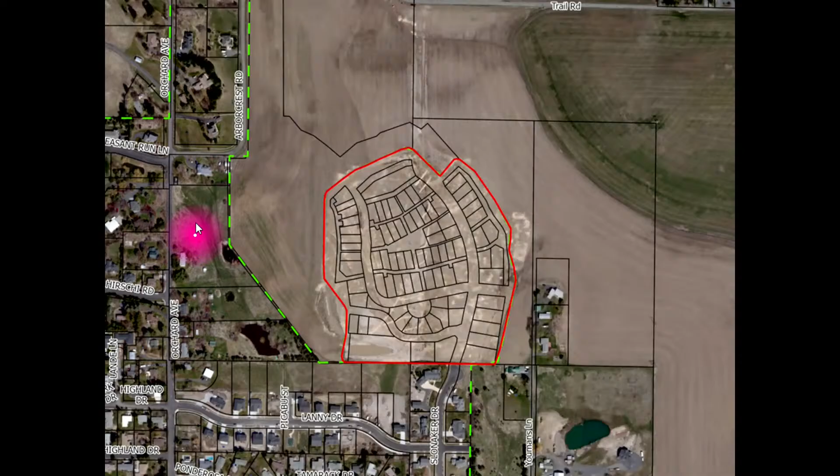This is the subject property highlighted in red, the center of your screen - it's the Woodbury 1st Addition. Currently an outdated photo, but infrastructure has been constructed on a portion, phase 1. Woodbury Drive, you can see the plat lines here, and Slonaker has been extended to about this location. Lanny Drive with Peekaboo Estates Edition is to the southwest. Orchard Avenue runs north-south, located to the west. Arborcrest and Trail Road are here to the north.

The applicant is Winston Company LLC. They're proposing the major PUD amendment of the existing 21.73 acre Woodbury 1st Addition subdivision to increase the number of lots from 78 to 107, ranging from 715 square feet to 22,215 square feet in size.

Also included in the proposal is the proposed preliminary replat of just a 12.27 acre portion of the existing subdivision, to create 81 lots from the existing 52. Those lots range from 715 square feet to 8,339 square feet in size. The proposal is referred to as the Woodbury 1st Addition replat, and it would increase the total number of lots in the subdivision from 78 to 107.

So a little bit of background: September 20th of 2021, City Council approved the annexation, comp plan designation, zoning designation, and PUD for Woodbury 1st Addition with no conditions. Subsequently, Council approved the preliminary plat for Woodbury 1st Addition with the following 3 conditions recommended by the Planning and Zoning Commission.

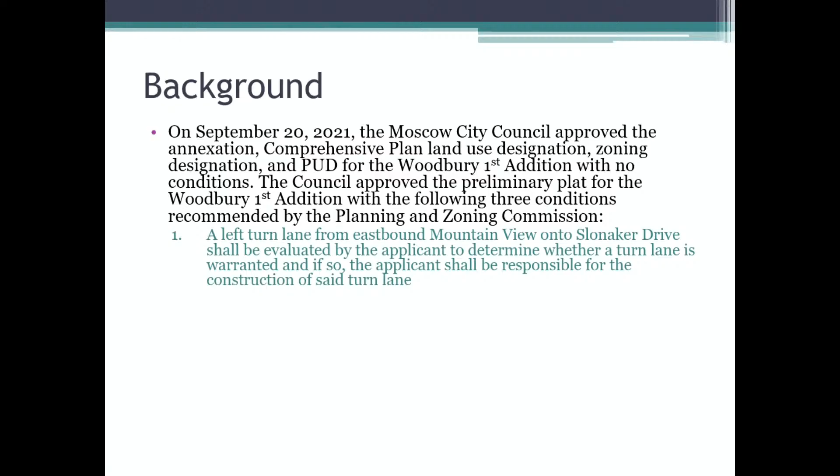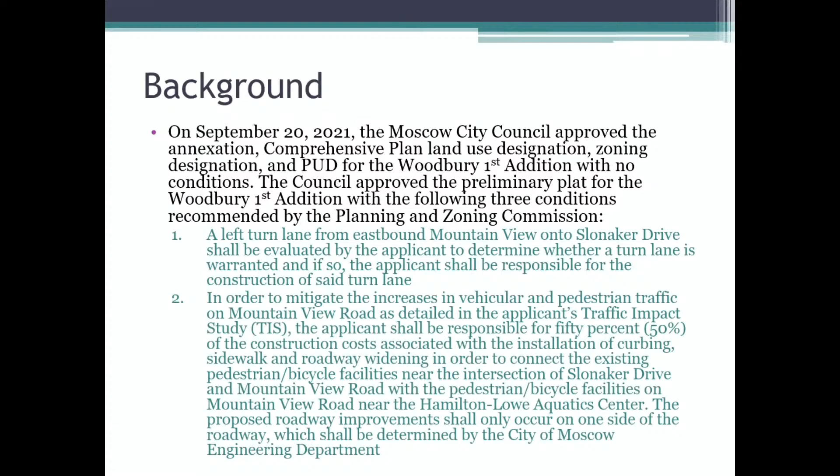The first was related to a turn lane eastbound on Mountain View onto Slonaker Drive. The second was improvements to Mountain View Road, essentially from the Herc all the way up to the Slonaker intersection, on the east side of the roadway. Then access shall be restricted to the subject property from Slonaker Drive. That was mainly just for the public infrastructure improvements to the streets at that time.

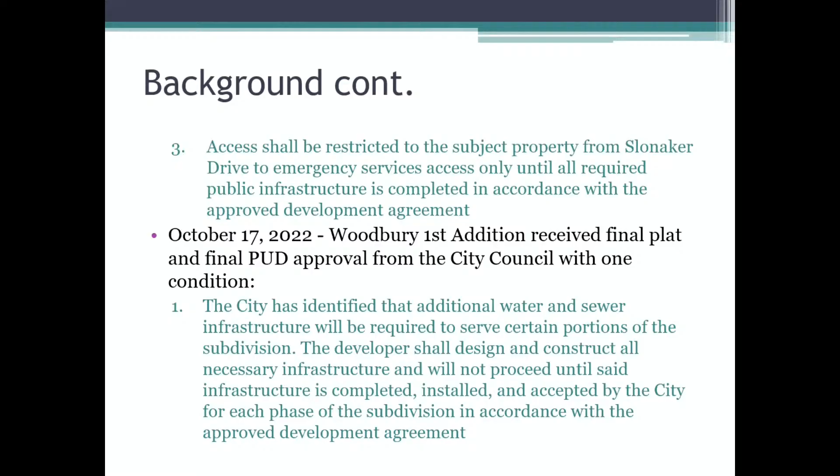October 17th of 2022, Woodbury 1st Addition received final plat and final PUD approval from the City Council with 1 condition. The city identified at the time that additional water and sewer infrastructure will be required to serve certain portions of the subdivision. Developers shall design and construct all necessary infrastructure and will not proceed until said infrastructure is completed, installed, and accepted by the city for each phase of the subdivision in accordance with the approved development agreement.

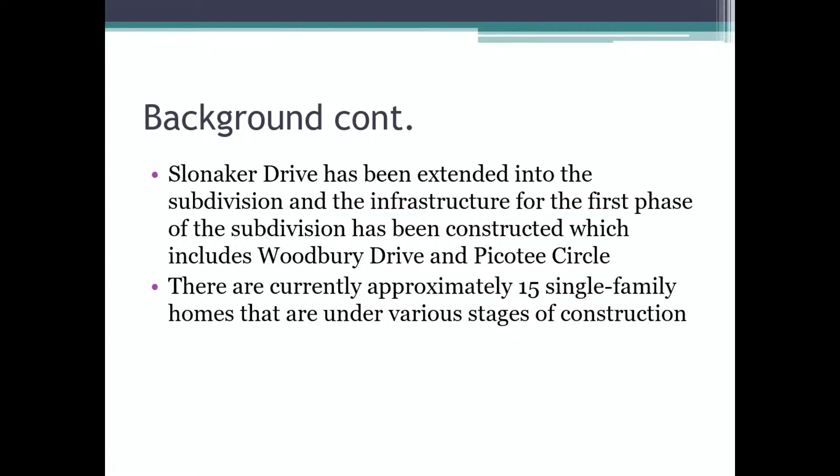As mentioned before, Slonaker Drive has been extended into the subdivision. Infrastructure for the first phase has been completed, including Woodbury Drive and Picotee Circle, with currently approximately 15 single-family homes under various stages of construction within the subdivision. Improvements to Mountain View Road—road widening, curb gutter, tree lawn, sidewalks, as well as the left-hand turn lane onto Slonaker Drive—were constructed in 2024.

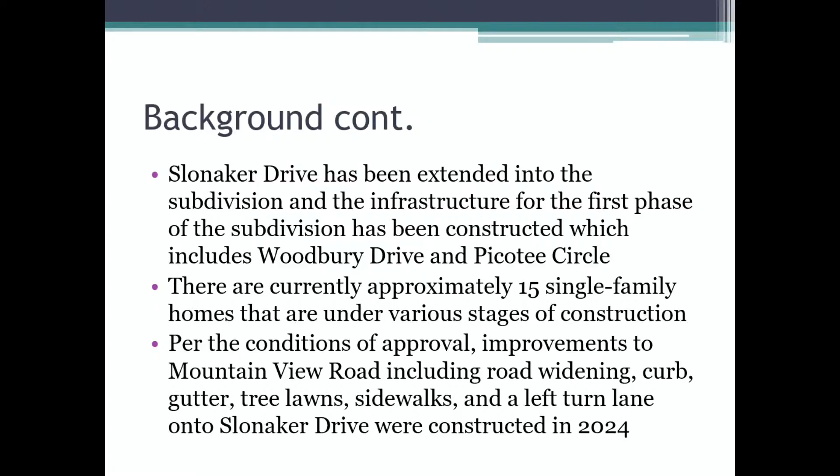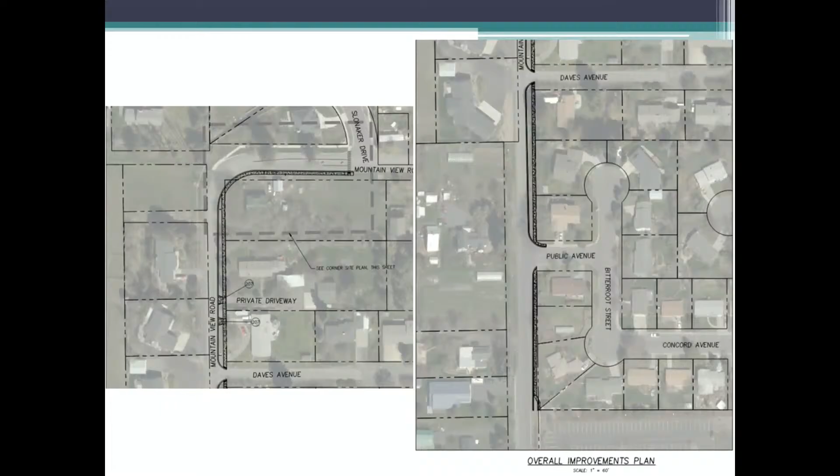You can see xeriscaping throughout the subdivision, with small lot sizes. These are the improvements that were constructed on Mountain View Road—you can see from the Herc all the way up to that intersection, and then there's the left turn lane onto Slonaker.

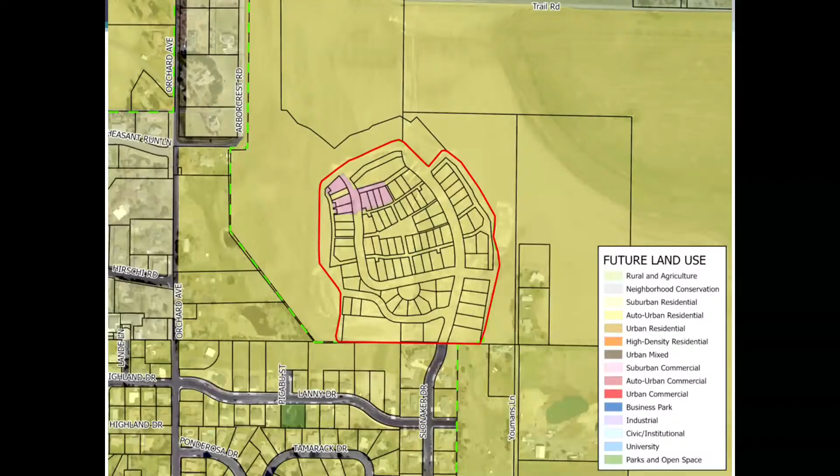The Comprehensive plan land use designation is suburban commercial for this pocket located near the Central Park area of the core development. Auto urban residential is the yellow designation, and the surrounding property is also designated as auto urban residential.

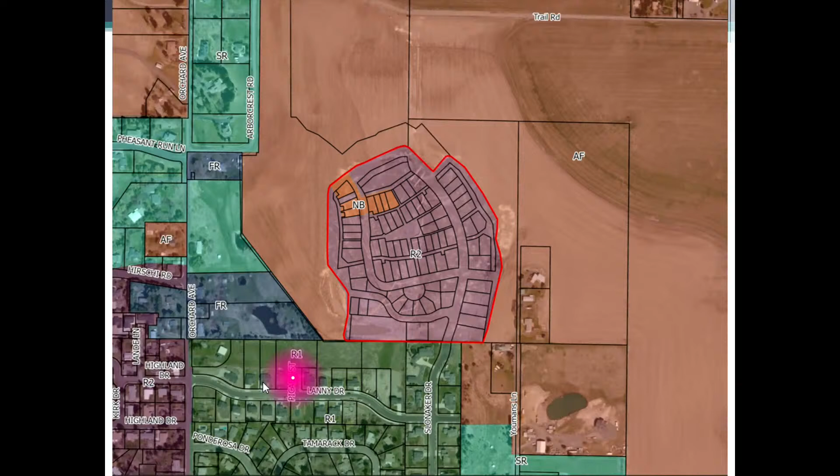The zoning configuration shows neighborhood business properties located near the core, and then an R2 designation, which is moderate density single family residential, for the remainder of the first phase of the subdivision. Surrounding the subdivision within the county is the ag forest zone, R1 down here with Peekaboo Estates, as well as the Blackwood addition on Slonaker Drive.

Continuing the background, the existing first addition subdivision and PUD is a 21.73 acre area with 78 lots ranging from 3,823 to 16,321 square feet in size. It's the first phase of a master plan subdivision, with a new urbanist design.

The entire property is 82 acres in size, extending from Slonaker Drive to the south, Arbor Crest Road to the west, Trail Road to the north, and slightly to the east of Youmans Lane to the east. This is the full master plan that the applicant plans on developing.

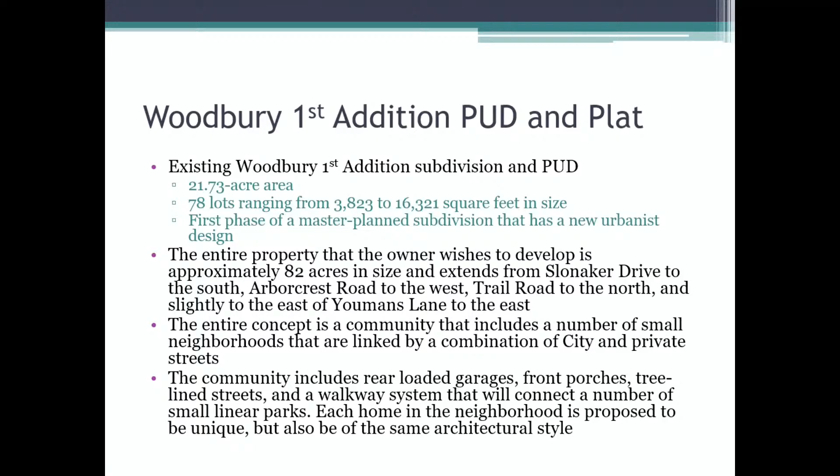The entire concept is a community that includes a number of small neighborhoods linked by a combination of city and private streets. It includes rear-loaded garages, front porches, tree-lined streets, and a walkway system that will connect a number of small linear parks. Each home in the neighborhood is proposed to be unique but also have the same architectural style. This gives an idea of how the rest of the 82 acres is planned to develop and how that first phase fits into the remaining 82 acres.

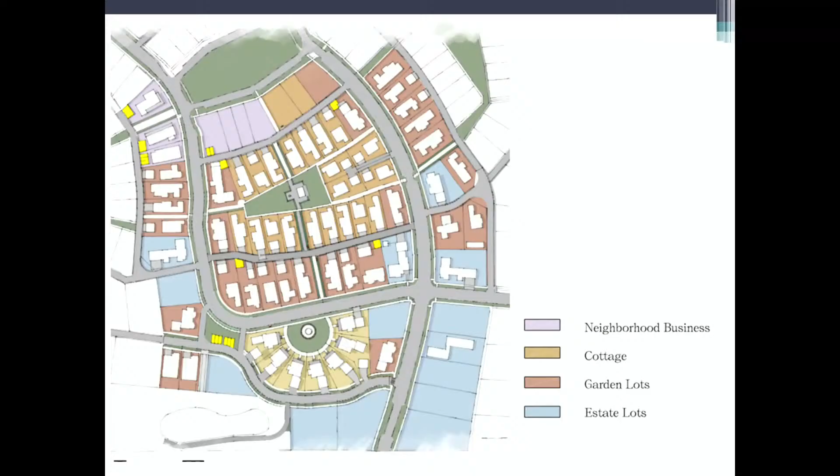So this was the original proposal. There's 4 different types of lots: neighborhood business, cottage, garden, and estate lots, really ranging in sizes. The estate lots were the larger lots on the outskirts of the development, trying to provide a transition from some of the existing subdivisions. They provided existing house plans as well as floor plans for each of the different types of lots.

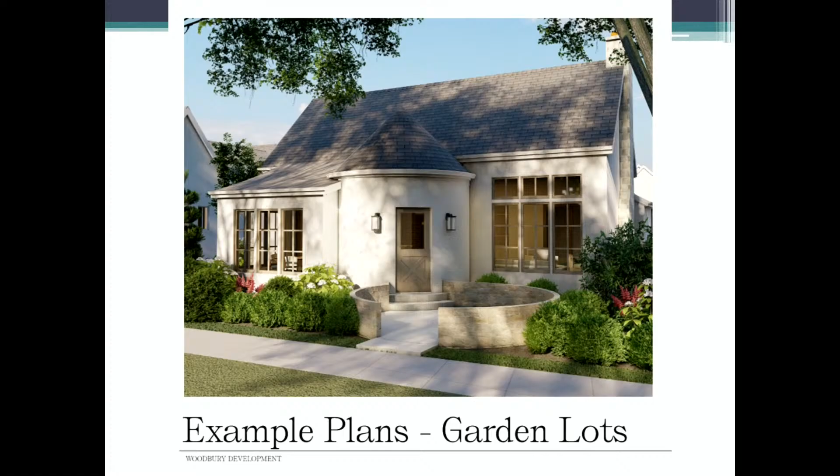So the applicants indicated they wish to make some changes to the existing subdivision and PUD in order to construct houses which are more affordable. Applicant indicates that one way of doing that without affecting quality is to decrease the size of the lots, decrease the size of the dwellings which are constructed upon the lots, and allow for a variety of housing types.

And therefore, they're proposing a major PUD amendment to increase the number of lots from 78 to 107. As part of the PUD amendment, applicant's also proposing the replat that we had discussed before. Currently contains 52 lots. The proposal will increase the number of lots within the replat area to 81 lots for a total of 107 in the entire subdivision.

So really, a few different areas the applicant's proposing changes on, about 5 different areas. And so we can start with Southwick Court and kind of move counterclockwise, but this is a Central Park area. Referring to the town center around the Central Park, and these are the neighborhood business zoned lots just for your reference here. So starting with Southwick Court, the proposal here is to take 4 existing lots and plat those into 9 more cottage lots with 2 different floor plans and sizes.

A walkway surrounds all of these lots here, provides access to the front, and then an internal parking area around the center of the development.

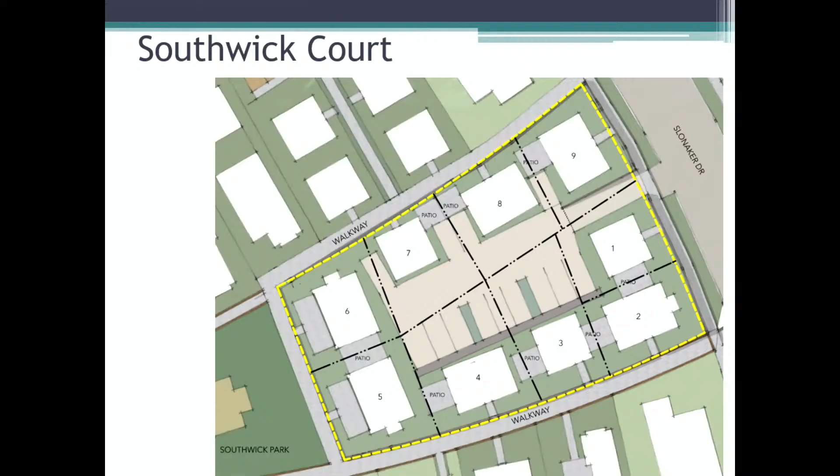So 3 dwellings are 1,100 square feet in size, contain 1 bedroom. 6 dwellings are 1,200 square feet in size and contain 3 bedrooms. All the dwellings in Southwick are proposed to be 2 stories in height, will surround a common parking area.

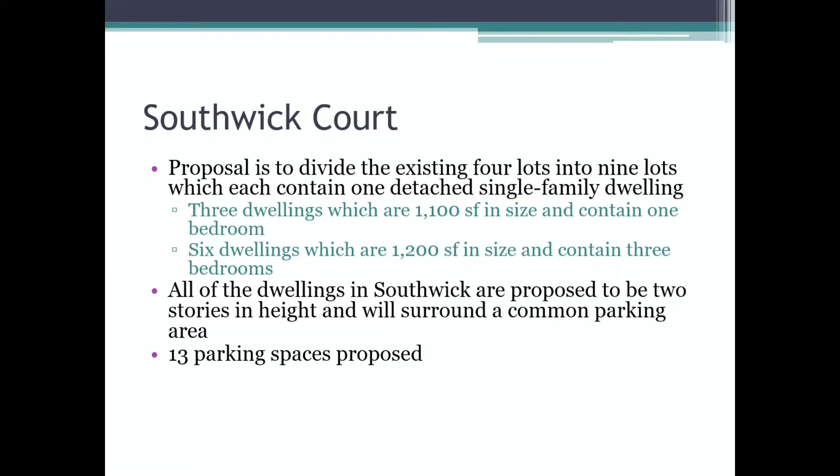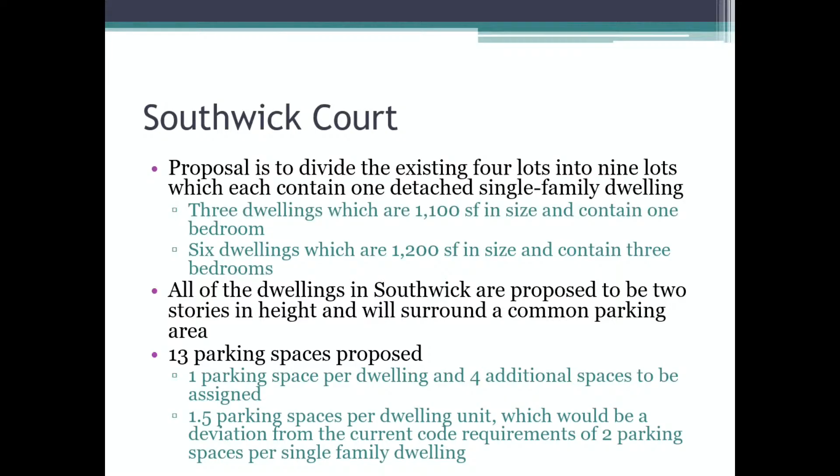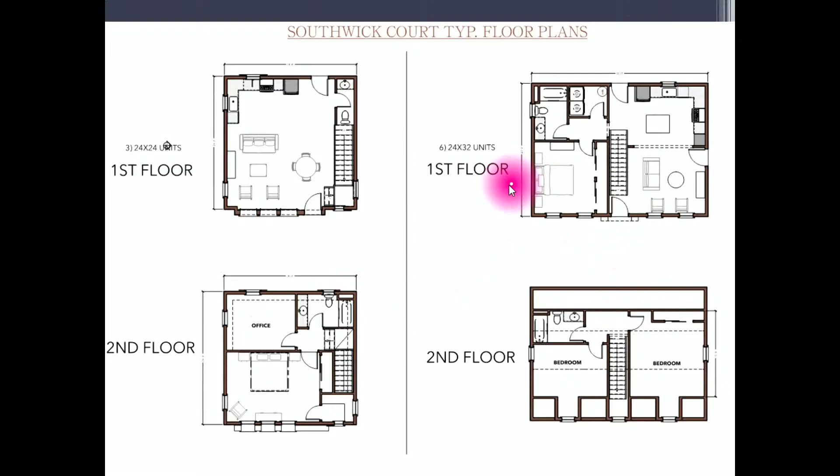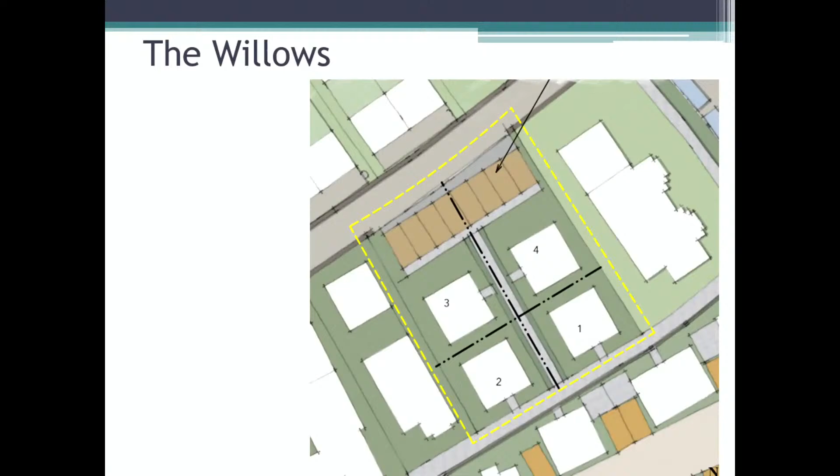So it brings us to the Willows, located here. So essentially dividing 2 lots into 4. And so these are smaller cottages with parking off of the private street.

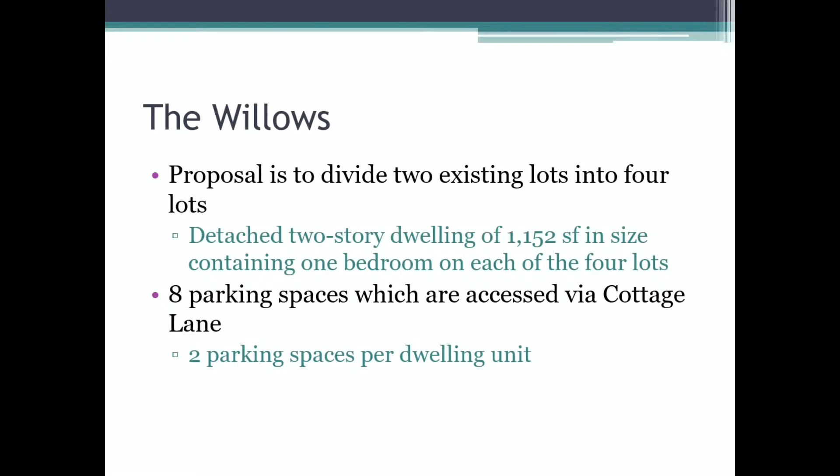So they're detached 2-story dwellings, 1,152 square feet in size, containing 1 bedroom on each of the 4 lots, 8 parking spaces, which are accessed via Cottage Lane. And that equates to 2 parking spaces per dwelling unit, which meets our current code requirements.

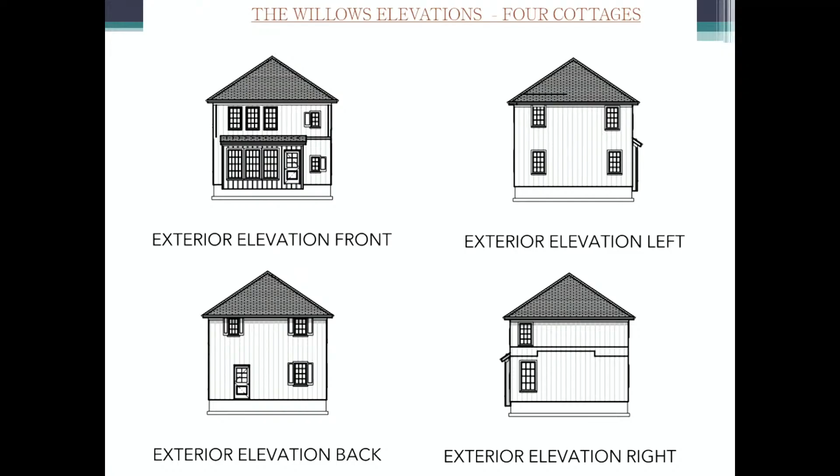Brings us to the Central Park townhomes portion. So some of these to the west of the pathway are within the neighborhood business zone. So the ones located over here, essentially planning on being townhouses for these units that face Park Place, which is the street that surrounds Central Park.

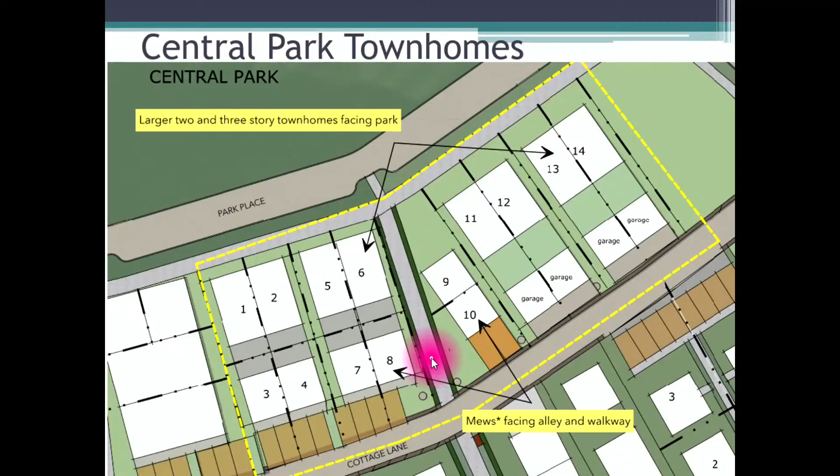And this is what the applicant's referring to as mews off the alley, which are just small dwellings. And then these townhouses to the east here have rear-loaded two-car garages.

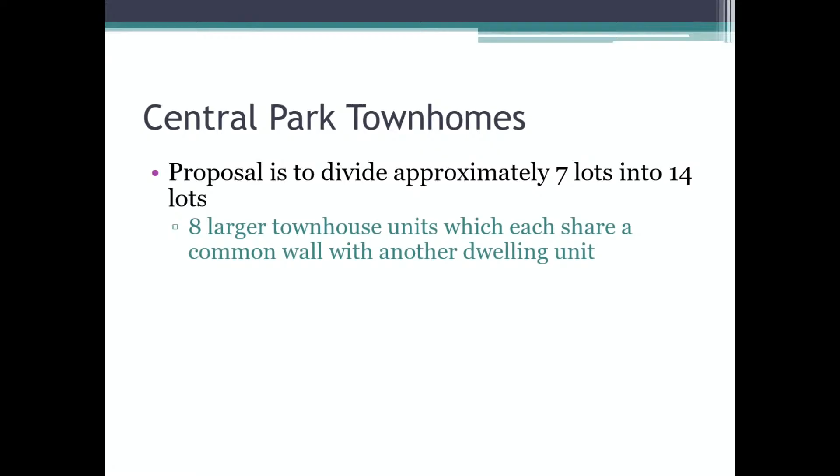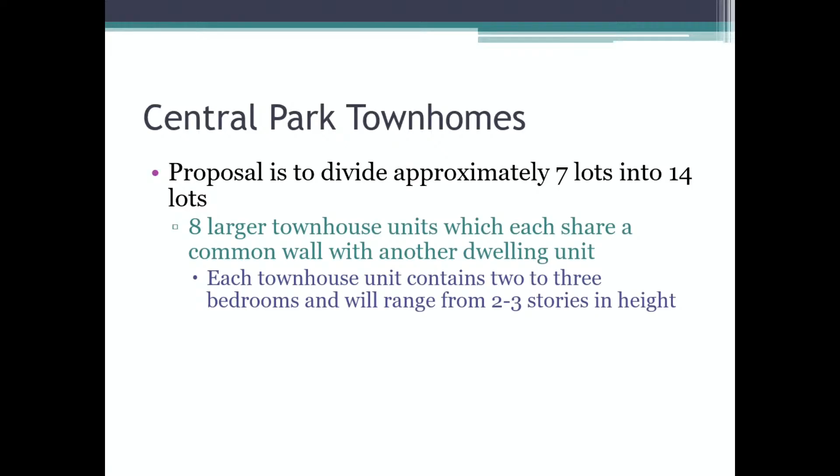So it's proposing to divide approximately 7 lots into 14, 8 larger townhouse units, which each share a common wall with another dwelling unit. So applicants calling these townhouses, but per our code, they'd essentially be twin homes since they're just 2 attached units. Each townhouse unit contains 2 or 3 bedrooms, will range from 2 to 3 stories in height, approximately 2,160 square feet in size.

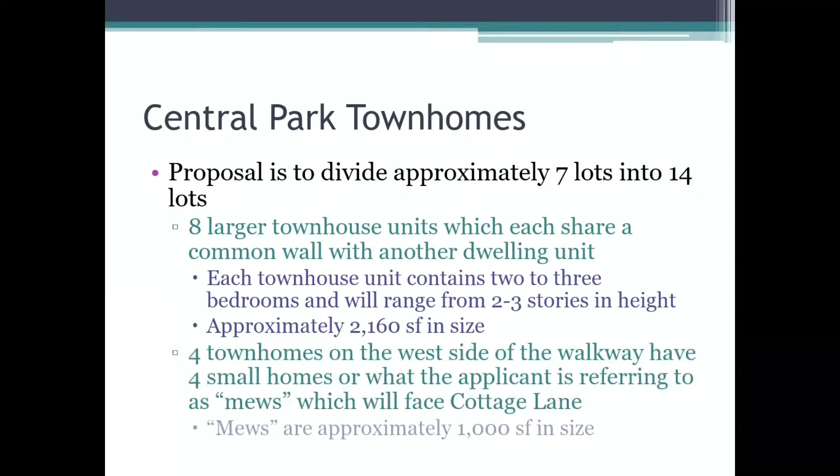4 townhomes on the west side of the walkway have 4 small homes and what the applicant's referring to as mews, which will face Cottage Lane. And they're about 1,000 square feet in size for the mews. So as I mentioned before, those 4 to the west townhomes and 4 mews are in the neighborhood business zone.

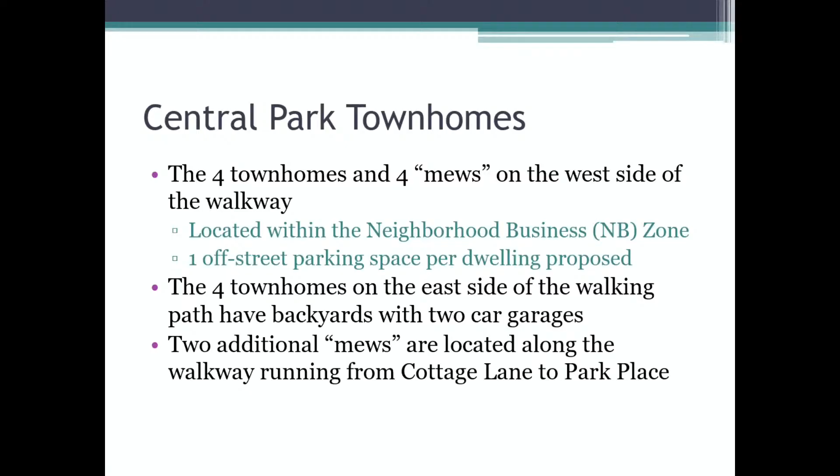Providing 1 off-street parking space per dwelling proposed. The townhouses on the east side of the walking path have backyards and 2-car garages, which meet our code requirements. The 2 additional mews are located along the walkway running from Cottage Lane to Park Place, and they have 1 off-street parking space per dwelling.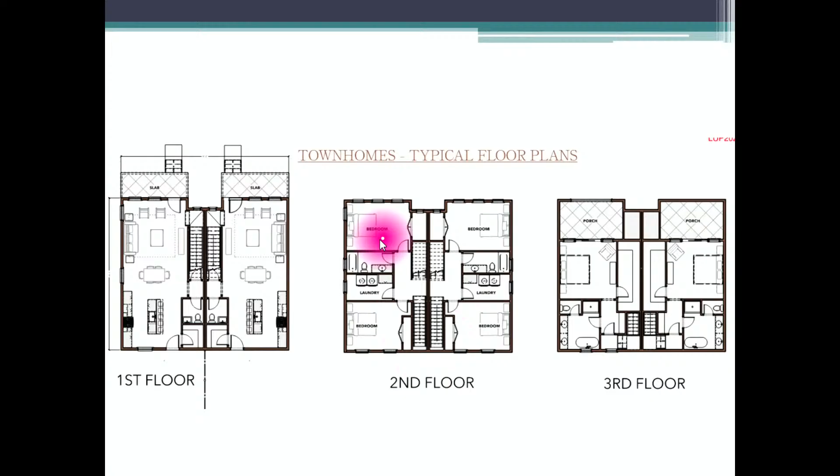These are the typical floor plans submitted for the townhomes. The first floor is living, dining, and front porches. The applicants indicated they're planning on building 2 or 3-story structures; obviously these are the 3-story. The second floor would have 2 bedrooms in each unit, and the third would contain an additional bedroom and a bathroom.

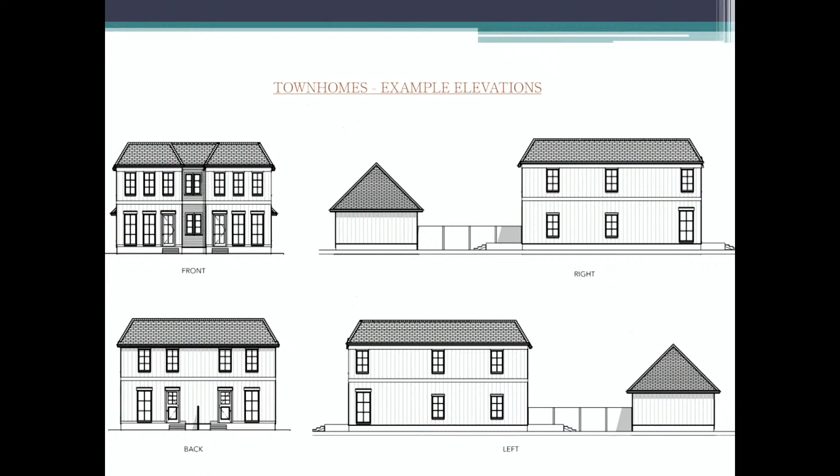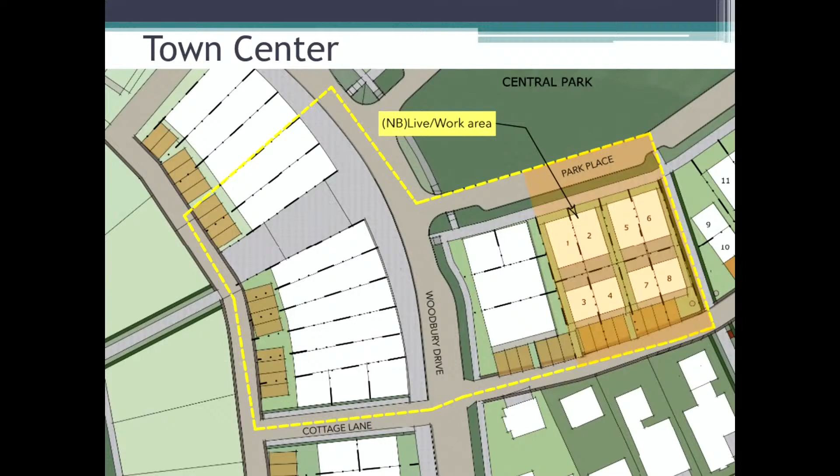Now it brings us to the town center located here. So you have a variation of townhouses in this area, as well as more neighborhood business, commercial ground floor, maybe some retail, office and residential above, rear loaded off of the private street to the west. And more urban design as far as the street, we can talk about that in a little while.

These neighborhood business lots adjacent to Woodbury Drive are proposed to be further divided from approximately 6 lots to 14, referred to as the town center. Redesigning these wider lots into narrow storefront lots intended to resemble 1890s downtown facades with 2 to 3-story buildings which share common walls.

Existing lots were approved to allow any use in the neighborhood business zone would permit, whatever structure would fit within the parameters of the PUD and neighborhood business zone. Applicants now provided more detail on the type of structure that will be built and what uses would be targeted for the town center lots, consisting of retail or offices on the ground floor with offices and dwelling units above. The number of dwelling units would need to comply with the base density requirements of the PUD, which we can go through a little later.

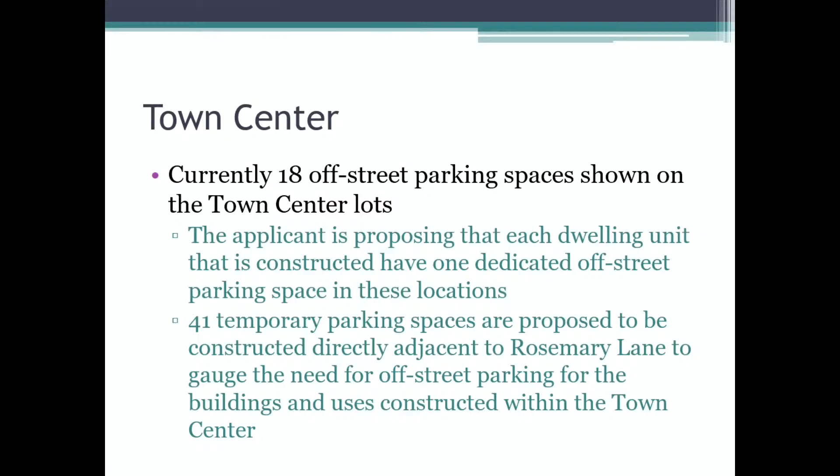There are currently 18 off-street parking spaces shown on the town center lots. Applicants are proposing that each constructed dwelling unit have 1 dedicated off-street parking space in those locations. They are proposing 41 temporary parking spaces on the west side of Rosemary, the private street that abuts these lots, to be constructed temporarily adjacent to Rosemary Lane to gauge the need for off-street parking for the buildings and uses constructed within the town center.

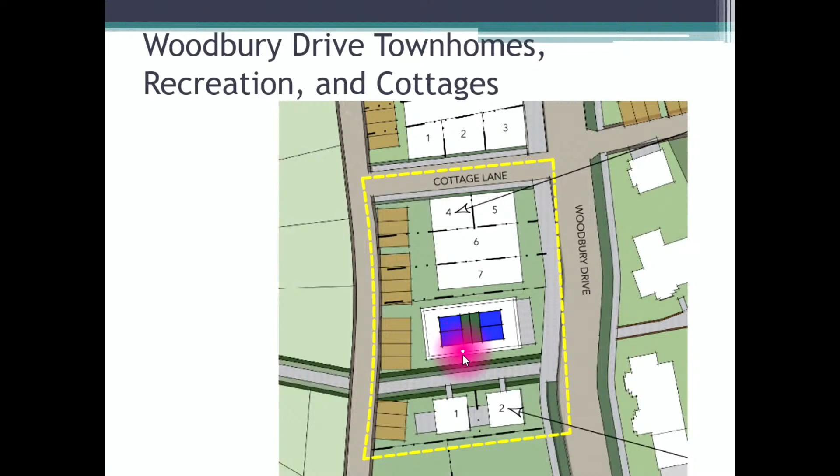This brings us to the last area of change, the Woodbury Drive area here to the south, intended to be townhomes, recreation with a pickleball court, and cottages. The townhomes are located here. They are planning on extending Cottage Lane as a new street extension across the street to break up the block a little bit. So townhouses, pickleball, and 2 smaller cottages there with parking off the alley.

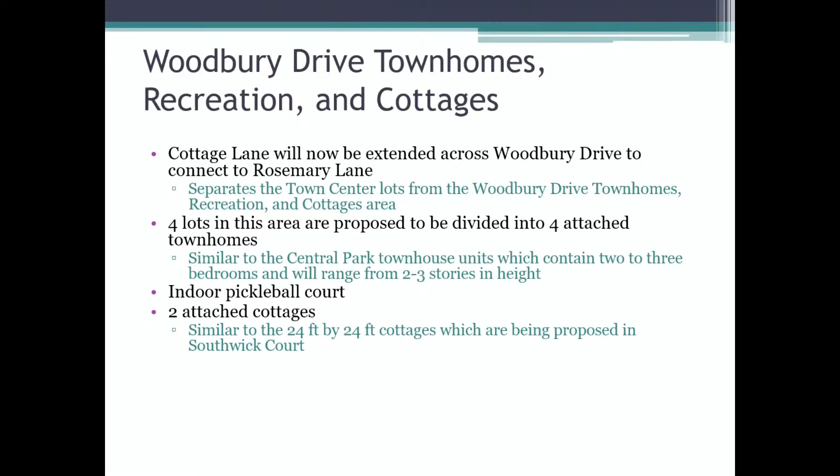So 4 lots in this area are proposed to be divided into 4 attached townhomes, similar to the Central Park townhouse units, containing 2 to 3 bedrooms and ranging between 2 to 3 stories in height. There's an indoor pickleball court and 2 attached cottages, similar to the 24 by 24 foot cottages being proposed in Southwick. Off-street parking includes 7 spaces to serve the 4 townhouses, 3 for the 2 cottages, and 4 off-street public parking spaces provided for the indoor pickleball court property.

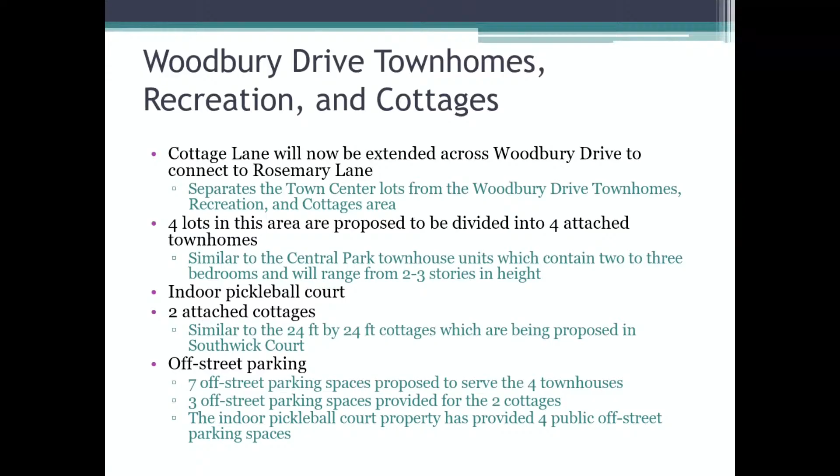Going through the base density, the R2 zone is 4.8 dwelling units per acre. The current proposal is 4.13 dwelling units being proposed, so within the base density requirement there.

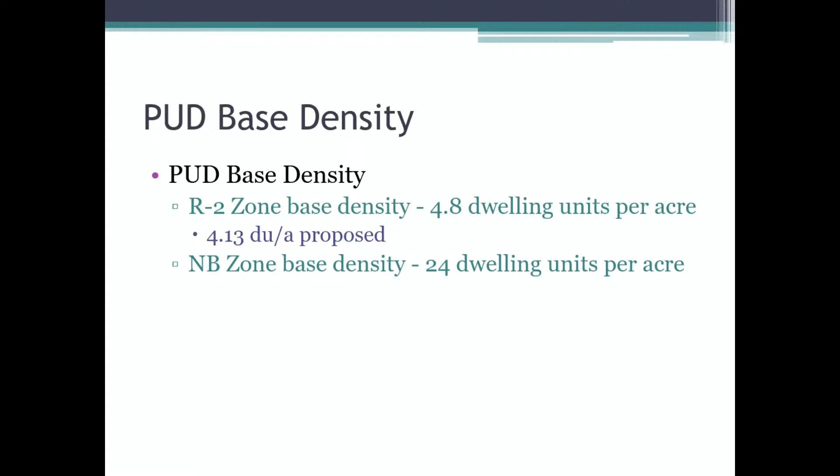The neighborhood business zone is 24 dwelling units per acre. There's 1.18 acres of neighborhood business zone land, so that would be 28 dwelling units they'd be restricted to, at least for the base density. The applicants proposed 21 lots in the neighborhood business zone, which would be limited to a total of 28 dwelling units. They intend to put some dwellings above some of the commercial properties near the town center, so they would be restricted to that limitation.

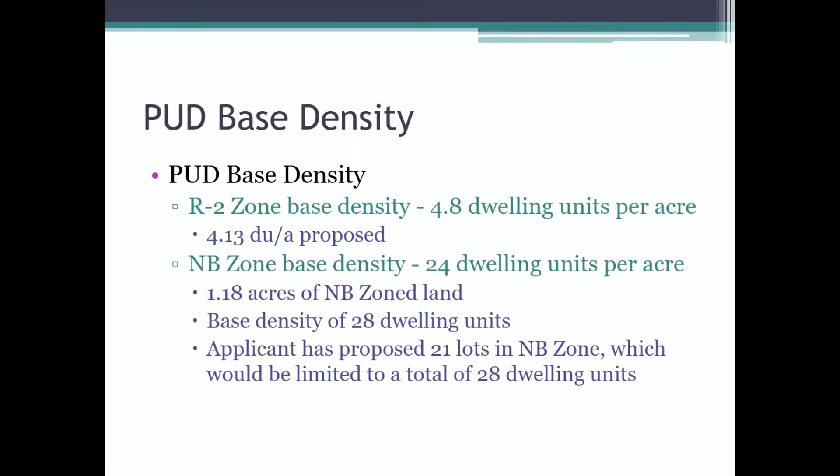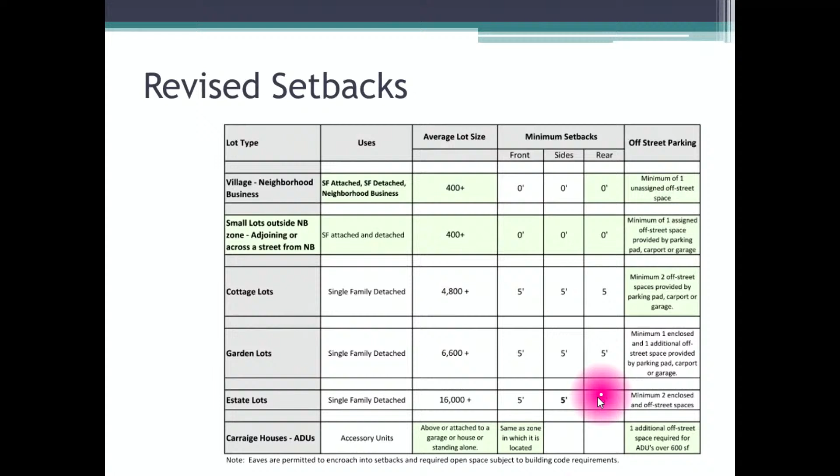Other changes involve the existing setback requirements. Typically it's about 5 feet all around for most lots, except around the neighborhood business lots where they had 0 on the sides and 5 in the front and rear. Estate lots were a little bit larger, 10 on the front and rear. In order to accommodate the range of dwellings and lot sizes being proposed, the applicant is proposing 0 setbacks around the neighborhood business and some of the small lots, remaining the same on cottage and garden lots, and a slight adjustment on estates going from 10 to 5.

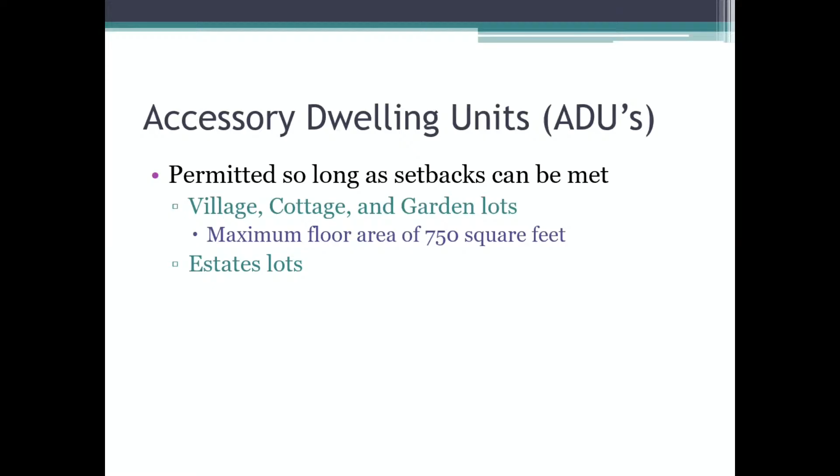Accessory dwelling units are permitted so long as setbacks can be met. The village cottage and garden lots have a maximum floor area of 750 square feet, allowed to go a little larger than our current code requirement of 600. The estate lots have a maximum floor area of 1,200 square feet, and they currently require 1 additional parking space. This is essentially citywide as well as within this PUD.

The applicant's proposing that only ADUs over 600 square feet be required to provide 1 additional parking space, and that's part of the proposal as well.

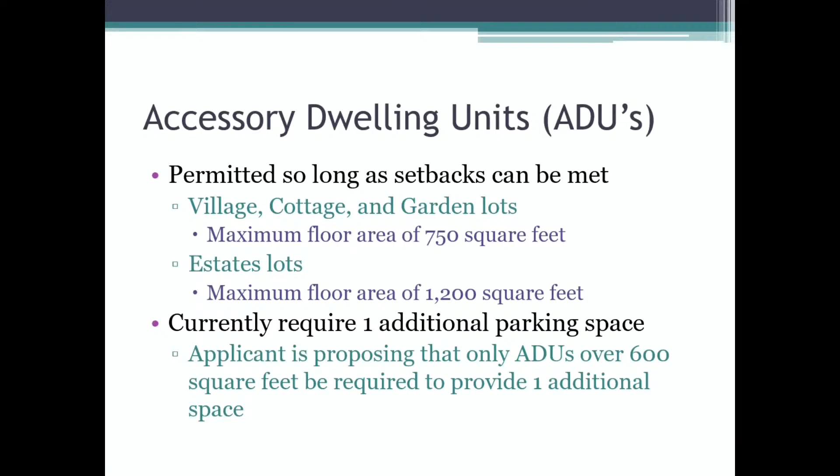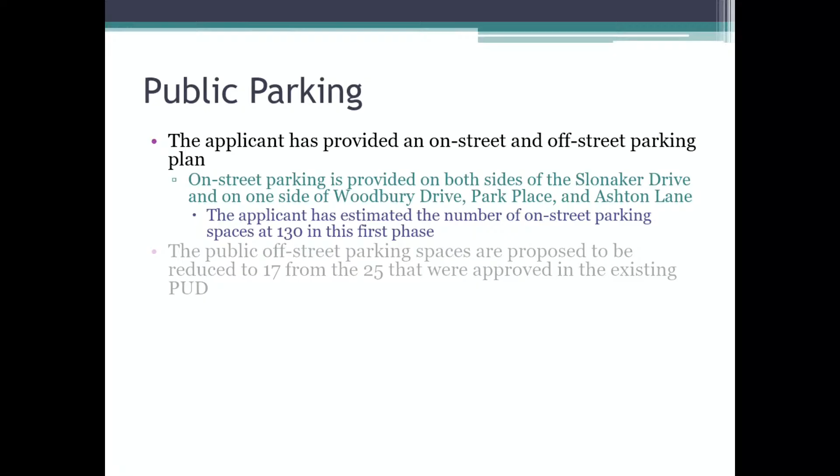Applicants provided an on-street and off-street parking plan. On-street parking is provided on both sides of Slonaker Drive and on one side of Woodbury Park Place and Ashton Lane. They've estimated the number of on-street spaces at 130 in the first phase. Public off-street parking spaces are proposed to be reduced to 17 from the 25 that were approved with the existing PUD. They are constructing, as discussed before, 41 temporary parking spaces adjacent to Rosemary Lane in order to provide public parking for the town center lots.

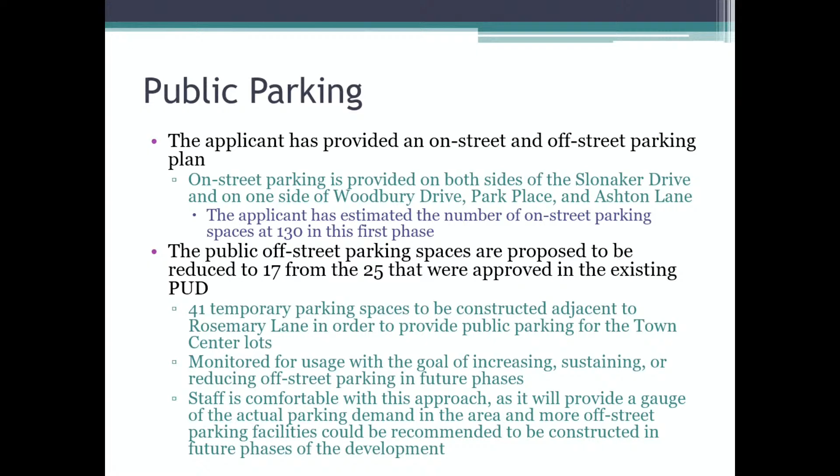The plan is to monitor for usage with the goal of increasing, sustaining, or reducing off-street parking in future phases. Staff worked with the applicant, and we're fairly comfortable with this approach as it will provide a gauge of the actual parking demand in the area. More off-street parking facilities could be recommended in future phases of the development, since this is just the first phase.

This brings us to the next proposal. Ashton Lane is currently public, and it's a one-way street.

I have a question before I forget, just about that 41. No, save it. Okay, I'll save it. Just remind me. Never mind, it's okay, just keep the ball rolling.

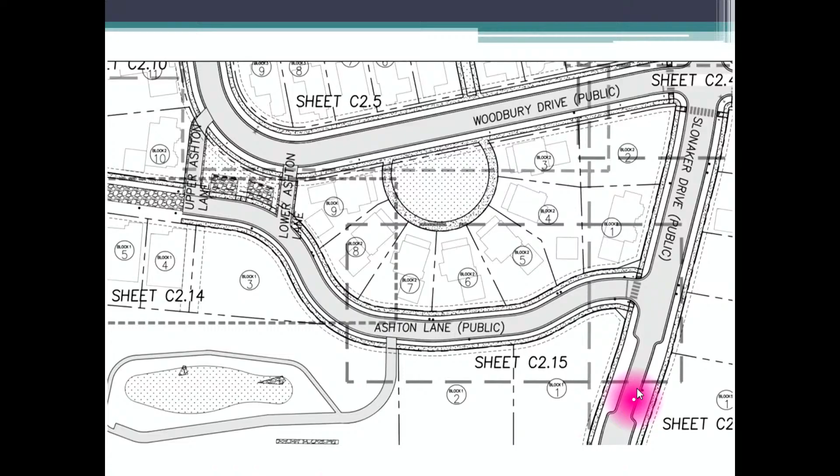So Ashton Lane is currently public. It's a one-way street with parking on one side of the street. This is towards the detention pond, with Slonaker and Woodbury here. So currently a public one-way street.

This was the street standard that was agreed upon and approved. The applicant is proposing to take that to a private road section and allow two-way traffic instead of just one-way, as well as parking on one side of the street, which alternates with street tree areas. You can see from the overhead here that these are intended to resemble street tree locations, and then they would have parking within a gravel strip, essentially within these street tree areas.

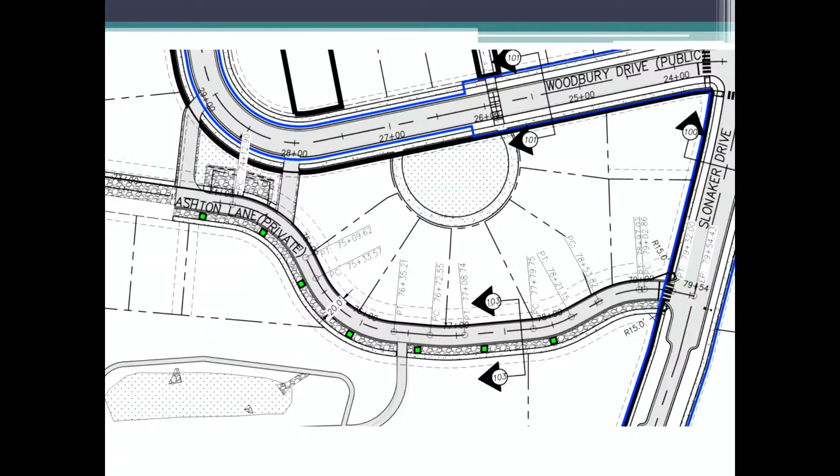We're fairly comfortable with a private street. The applicants indicated that they'll engage in a private stormwater system. That was the concern with gravel entering a public stormwater system, but they've worked with streets and engineering in order to come up with this proposal, and I think we're comfortable with that as well.

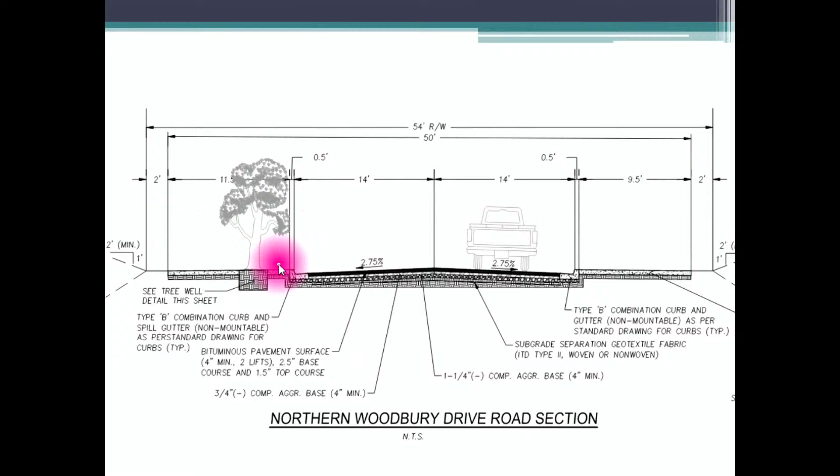Northern Woodbury Drive, as mentioned before, is going to more of an urban standard. So this goes from our 28-foot residential standard to more of an urban standard, just because it's transitioning into the town center. So 11-foot to 11.5-foot wide sidewalks with a furnishing zone and trees, and then a 9.5-foot sidewalk on the other side of the street, just for a block and a half area. Also going from 60 feet for the standard right-of-way width to 54 feet, and that's really the impetus for the vacation being proposed tonight as well.

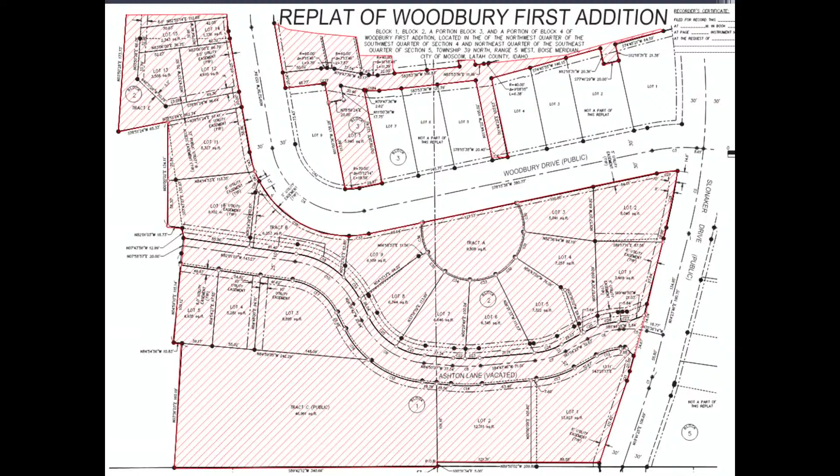This was the replat area, essentially just reflecting what the PUD amendment is proposing. The areas being replatted are just in the shade of red there, crosshatched—mainly just the areas we just discussed, as well as across Slonaker Drive to the east, essentially just shifting some lot lines around. This is currently 4 lots, and just changing the configuration, still remaining at 4 lots there.

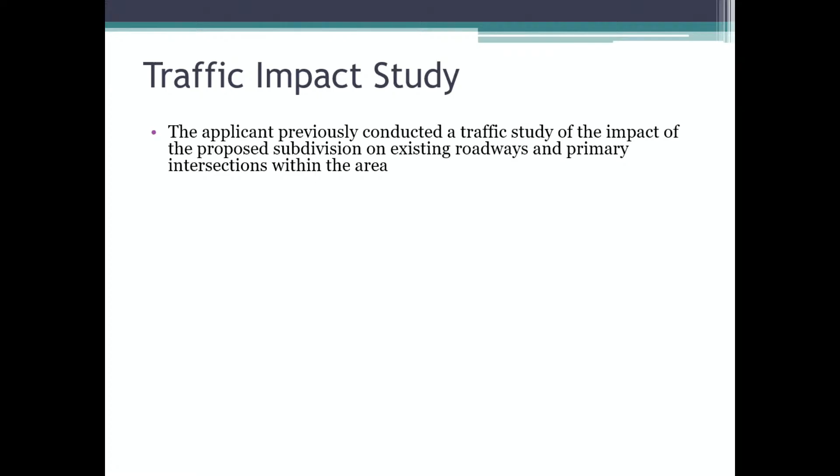The intersections analyzed were Mountain View and D, and Mountain View and F. A traffic impact study was conducted for the full build-out of the subdivision at an estimated 270 dwelling units. It concluded that the proposed subdivision is expected to result in minimal impacts to vehicle traffic conditions at the study intersections and meet city operating standards under all development scenarios.

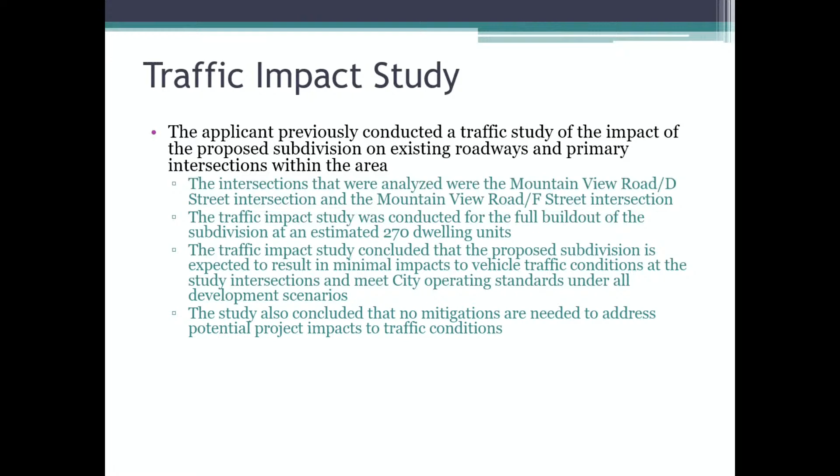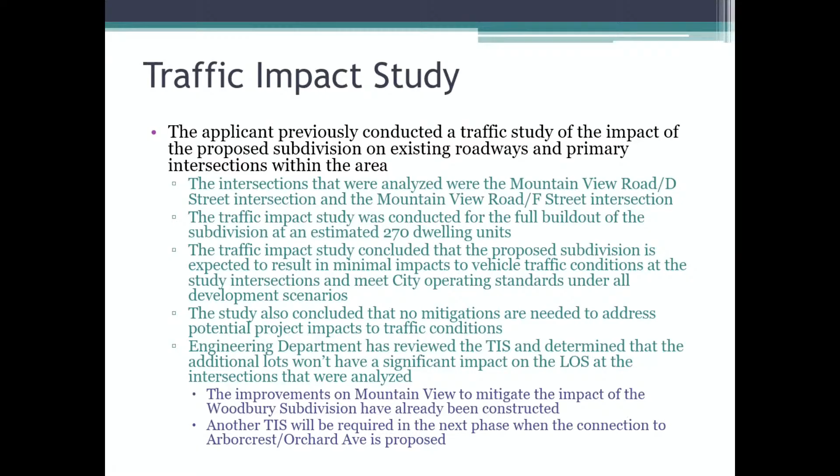It also concluded that no mitigations are needed to address potential project impacts to traffic conditions. Our engineering department has reviewed the prior TIS and determined that the additional lots won't have a significant impact on the level of service at those intersections analyzed. Of course, the improvements to Mountain View Road to mitigate the impact of the development have already been constructed. And we require another TIS to be conducted at the next phase when the connection to Arborcrest Orchard is being proposed.

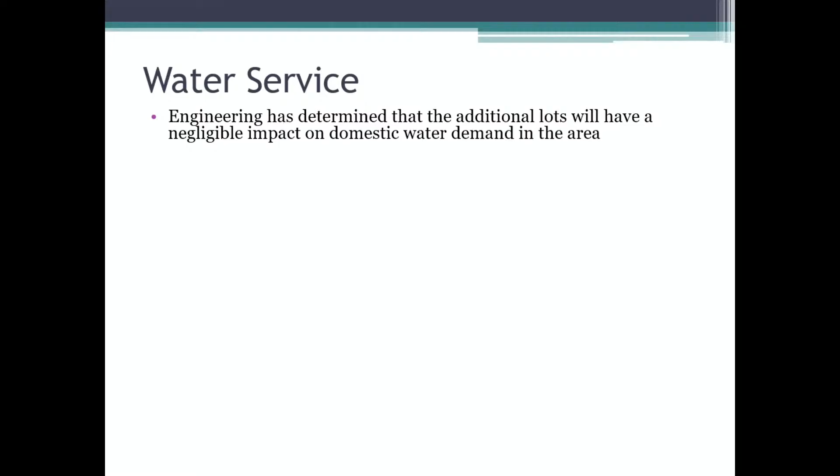Looking at water service, the engineering department has determined that the additional lots will have a negligible impact on domestic water demand in the area. NB zone lots with potential commercial uses may increase fire flow for the subdivision. There's a water modeling report for the original plat done prior to upgrades to the Ponderosa booster station, which recommended connecting to the main pressure zone in Slonaker, as the Ponderosa station was insufficient to serve the development.

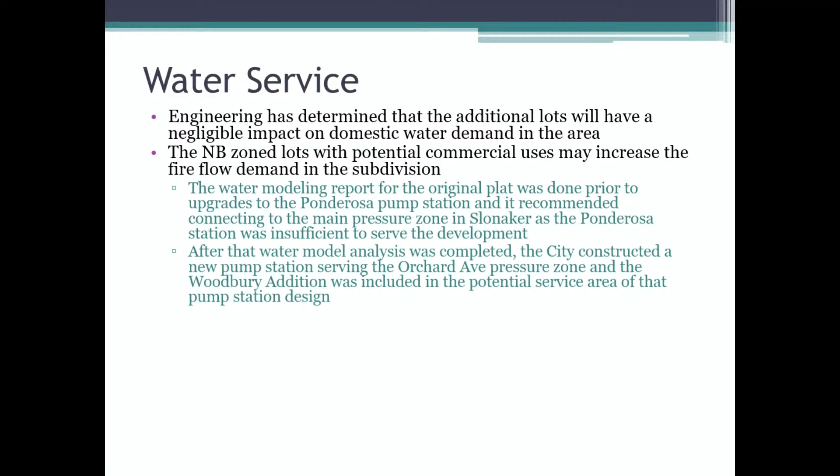After we conducted that water modeling analysis, the city constructed the new pump station serving the Orchard Avenue pressure zone, and the Woodbury addition was included in the potential service area of the pump station. Developers also constructed a connection to that pressure zone and installed a pressure reducing valve near the connection of the main pressure zone in Slonaker, expanding the Orchard pressure zone as intended in the new pump station design.

So we've got recent flow tests in the vicinity of the neighborhood business lots coming in at 3,800 gallons per minute, which should be sufficient to serve any use that occurs there. Any supply deficiencies for other uses can be mitigated by installing fire suppression systems in the building and/or constructing a building with a more fire resistant building type.

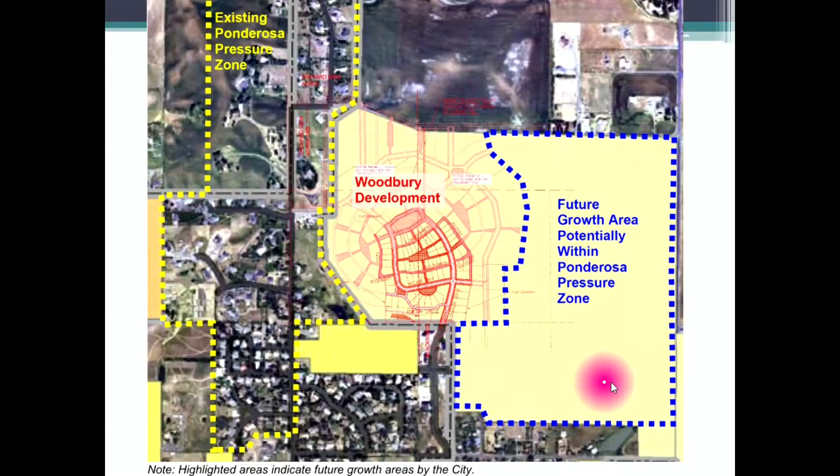So this was the existing Ponderosa zone. You can see the Highland Drive area, Orchard, Arborcrest. And these were the areas that were expanded with the new booster station. So Woodbury, the entire property, as well as the trail property to the north, could potentially be within the Ponderosa zone as well.

Storm sewers are piped and conveyed to an existing detention pond in the southwest corner of the subdivision. Because of the increased density and subsequent increase in overall impervious area of the development, the existing Woodbury stormwater report will need to be revised, and any necessary modifications to the existing detention pond will need to be completed in the next phase of the development. Of course, it needs to meet our stormwater runoff control standards to be detained at the pre-development rate.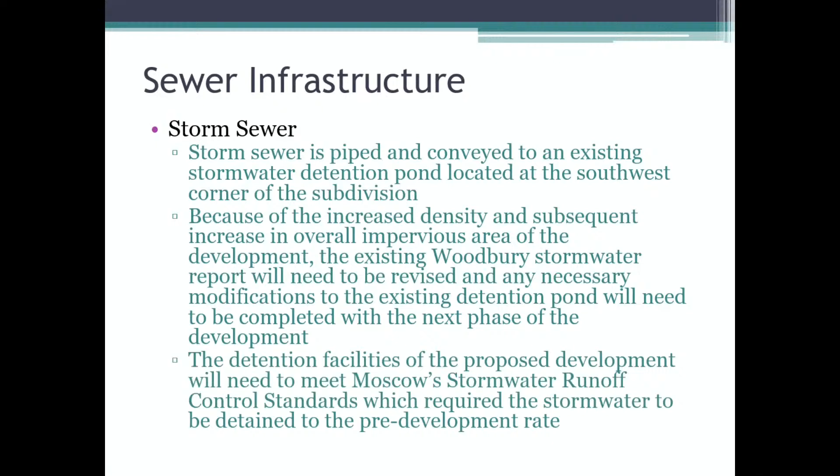No changes are needed to the existing sanitary sewer system. The engineering department has indicated that the planned Lanny Drive connection will need to be made in the next phase of the development. So that brings us to the recommendation.

The Planning and Zoning Commission conducted a public hearing for the major PUD amendment and replat on June 25th of last month. They recommended approval with one condition: the applicant shall be required to update the existing stormwater report for the subdivision and include any mitigation actions necessary to ensure the stormwater facilities will have no downstream adverse impacts, subject to the approval of the city engineer.

With that, staff recommends the council conduct a public hearing upon the major PUD amendment and preliminary replat, and upon consideration of testimony received, approve the major PUD amendment for Woodbury First Addition with no conditions, and adopt P&Z's RCS document. Then, if the major PUD amendment is approved, approve the replat of Woodbury First Addition with one condition, and adopt P&Z's RCS document.

And certainly we'll try to answer any questions you had. I know you have one. Yeah, I do. Sorry, it was just a clarification. I'm gonna just go through my list, is that okay?

Those 41 parking spaces that you were calling temporary—when I first read that, I thought you meant short term, but you really mean temporary, like if they're not used, they're going to go away and be redeveloped into something else? Well, I think we would assess that in the future at the next phase. So they're technically on the property of the next phase, which the applicants purchased from the underlying property owner.

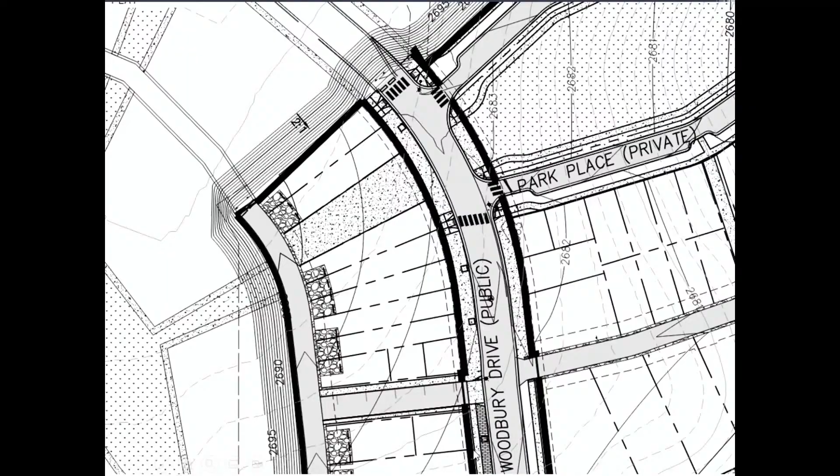So this meets our 28-foot standard. Okay, we were talking about Ashton Lane, which is a little hiccup, as being a road going from a public one-way street to now a private two-way street. If approved with it going private and two-way, it would accommodate the parking on the shoulder with the gravel, which would require additional work for the stormwater. Okay, I think I'm picking up what you're putting down. I think that's the only clarifying question I had. Thanks.

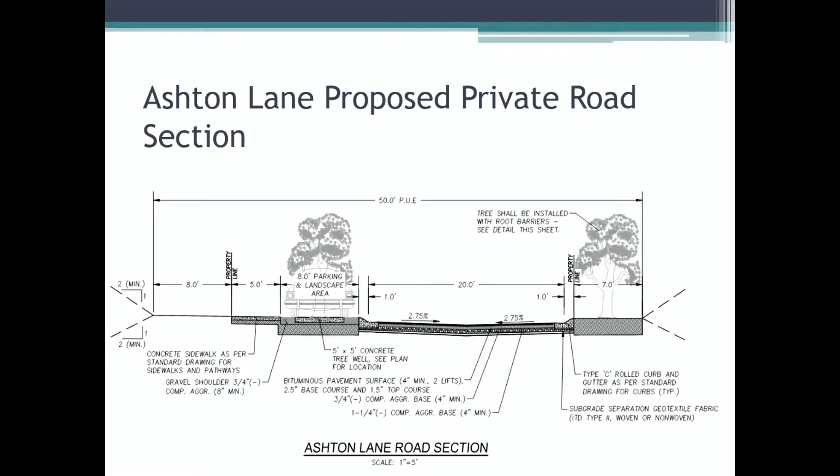So I'll just echo a couple of things that were stated previously, and I appreciate your presentation, Mike, and I'm glad you brought your water bottle up. Sometimes you forget it. So, yeah.

Shared with the other councilors up here, I do have concern about the parking issue, and that's all over my notes. For my own knowledge, this is the first time I've seen this kind of request come through council in my time being on it. I'm curious if the city has amended and granted amendments to planned PUDs in this process before, and what that's looked like, and if the scale has been similar or smaller or larger. Because I share Gina's sentiment that the smaller square footage units definitely appeal for a variety of reasons, and I think that's something to look at, and we can talk about that here in just a bit. But I'm curious what a last amended PUD looked like, just for a frame of reference. It might be a little helpful.

Minor amendments are fairly common, but I can't really recall a major amendment that we've gone through over the years. Okay, because I know the word 'major' is deliberate in the packet and in your presentation, so I actually appreciate that distinction there.

So you can think of minor as approved administratively, and the council wouldn't see those. Right, those are minor deviations to the PUDs, but major essentially is almost starting from the beginning of the process: neighborhood meeting, public hearing before planning and zoning, then public hearing before council. So it follows the same process as the original PUD. But there's a number of 12 criteria or so that kick you into the major PUD, and one of them obviously is increasing density, number of units. Great, so I appreciate that very much.

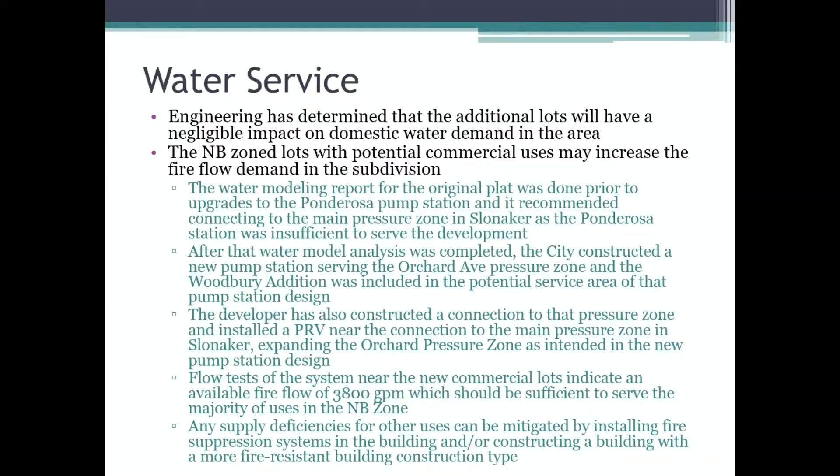That's the word I wanted to focus on here. I don't want to err too far into deliberation, but being the council liaison for planning and zoning, there was a lot of concern about water, so I wanted to bring that up for us to focus on, and I appreciate you bringing that. How close is the Ponderosa pump station to this? It's pretty close, right at the end of Land and Orchard intersection. We purchased that property when Peekaboo Estates was being platted. Okay, great, thank you, Mike.

Anything now, Sandra? I'm waiting. Okay, I do have just one little question, and maybe this isn't appropriate for now, and you guys can tell me to hush. The fire suppression systems, is that an expensive thing? Like if I'm a business owner, is that a $200,000 thing, or will it be a barrier to entry in any way? That's my question.

Yeah, I mean, obviously it's more expensive than standard construction, and so there is a cost associated with that. I can't quote you. There are different types of systems, residential and commercial, and it really just varies depending upon what the use is. But I couldn't even begin to tell you a cost there.

Okay, I just would hate that it would be a built-in barrier. I can't really comment on the cost of a fire suppression system, but just looking at the IFC to provide some frame of reference here, for a single family home under 3,600 square feet in size, that fire flow requirement is 1,000 gpm. So I think Mike indicated 3,800 was the test result.

Now that fire flow varies depending upon the construction materials and methods. Wood frame might be the least, concrete and steel structure would be the most fire resistant. So at 3,750 in the IFC, you wouldn't have to install suppression until you were over 20,000 square feet, or the fire flow would support a building of 20,600 square feet. Pretty good size. If you get more fire resistant construction to the extreme of a type 1B, you're up to 128,000 square foot building, and that 3,800 would be adequate fire flow for that building. So it's that spectrum between 20,000 to 128,000 square feet.

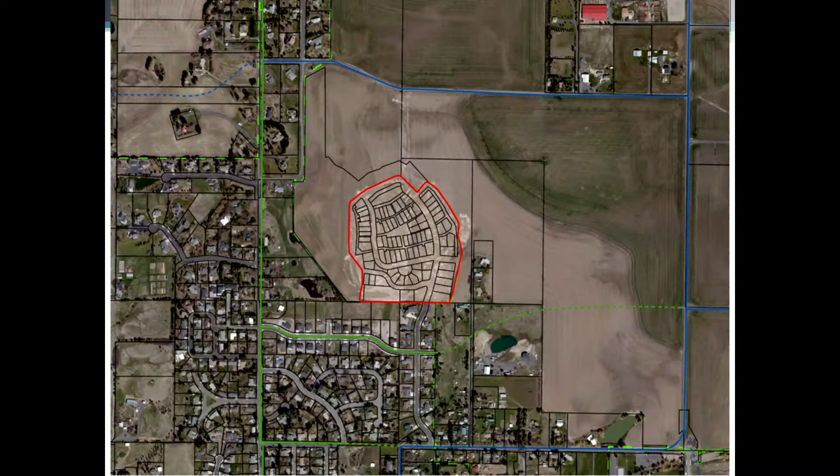I remember my last one, and this one may actually qualify as deliberation, Mayor, so we can wait. No, it's fine. Okay, we got it. So at this time we segue off to anything that's been missed, any of the questions associated with this on the part of the applicant. So it's your time to shine.

Good evening, Your Mayor and council members. My name is Mark Wentz, and I live at 1004 Dairy Lane in Moscow. Thank you for having us tonight, and thank you for your time. I really appreciate it, and thank you, Mike, for your presentation, it was really fantastic, a lot of work. We moved to Moscow from Los Angeles about 25 years ago. I've been a builder and developer down there, did about 200 homes and other commercial buildings.

Los Angeles, as you know, is like the poster child for sprawl, for post-World War subdivision development. But there was a lot of nicer stuff up in the hills that I saw when I was a kid. My parents and relatives lived around the area, whether it's Pasadena or the Hollywood Hills or whatever, and really fantastic housing.

When we walk the streets and just look at houses, that's just a pastime. So when this new urbanist movement came back maybe 40 years ago, it started looking at what we can do to really take the best of our old housing areas and bring that back - the shady lane, slightly narrower streets, maybe alleys, front porches, things like that. I took a real interest in it. Didn't have an opportunity to do a lot, but it starts to affect everything you do when you love something. And when we came to Moscow, I thought, what can we do in Moscow? I think the answer was, over time - it's taken 25 years - Woodbury, something that kind of incorporates all these ideas into something that can be really beautiful.

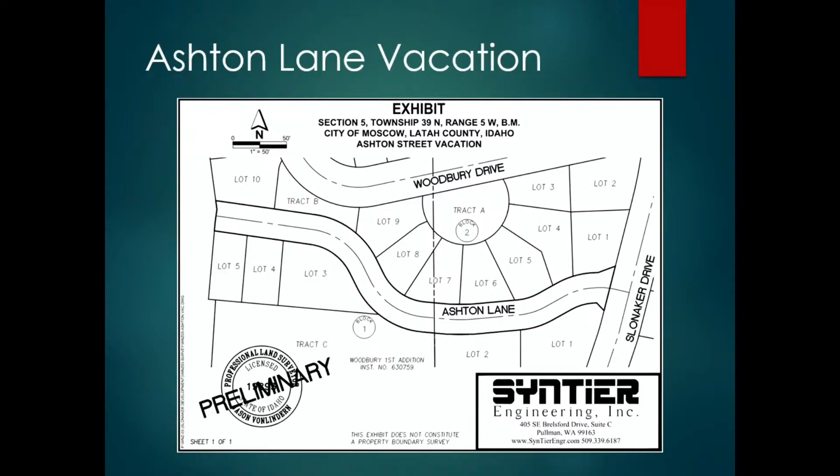The two vacations we are looking at today: this is the Ashton Lane vacation, as we've already talked about at length. This roadway was originally platted to be a public road, meeting public standards. As the developer wanted to change the road types and surfacing types, we encouraged him to go with a private road instead of a public road, so he could move forward with his vision and alleviate us from some of the maintenance responsibilities.

The other vacation we're looking at is Woodbury Drive. This is the portion of Woodbury that goes through the town center portion of the replat. These lots are where the neighborhood business lots will be, and part of the new vision is a roadway that will still have our 28-foot travel way, but the sidewalks will extend out to the edge of the right-of-way. There will be a zero setback, and narrowing this right-of-way allows for more of the neighborhood feel that the developer is going for.

So this vacation would eliminate 3 feet on either side of the existing 60-foot right-of-way, reducing the Woodbury right-of-way down to 54 feet. It also eliminates the 2 public utility easements that run adjacent to that right-of-way.

The public utility easement on the west side will no longer be needed. Those easements are going to be run down the east side of the lots, down the private road, so that is no longer needed. The public utility easement on the east side of Woodbury will be replatted with the new plat.

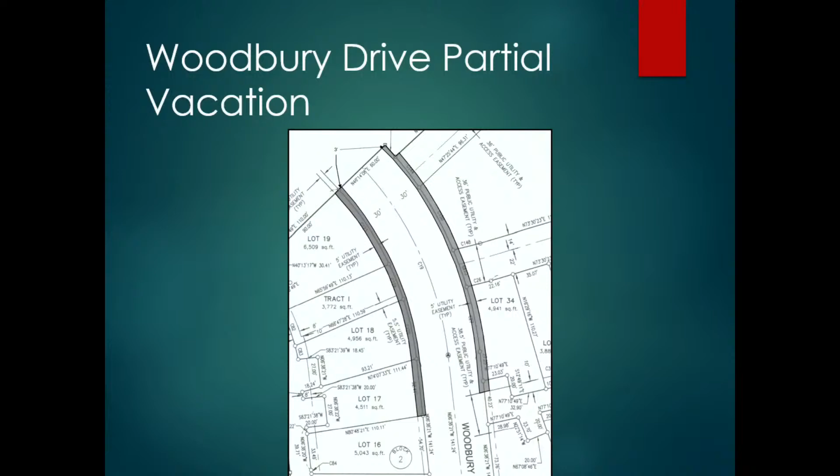Staff's recommendation is to hold a public hearing, and after considering public testimony, approve the vacation ordinance under suspension of the rules requiring three complete separate readings, and that it be read by title and published by summary.

Do we have any questions? Okay, no questions at the moment. At this time, we invite the applicant to come up and provide any further testimony. Mr. Wentz, you still get to introduce yourself again.

Mayor and council, my name is Mark Wentz. I reside at 1004 Dairy Lane, Moscow. Applicant here. This is a lot to do about a little thing.

I mean, I gotta say, we kind of wrestled with the width of the street. We didn't get anywhere in terms of city standards, but we just kind of kept coming back to this Ashton Lane, that it's going to have really low traffic and very little parking on it. We've seen some other projects where they've done this, where they have a parking lane that's gravel and you put your trees in that parking lane, and it sort of brings the tree cover together more, quicker. So it's a small thing, but it was just a little detail that we wanted to do.